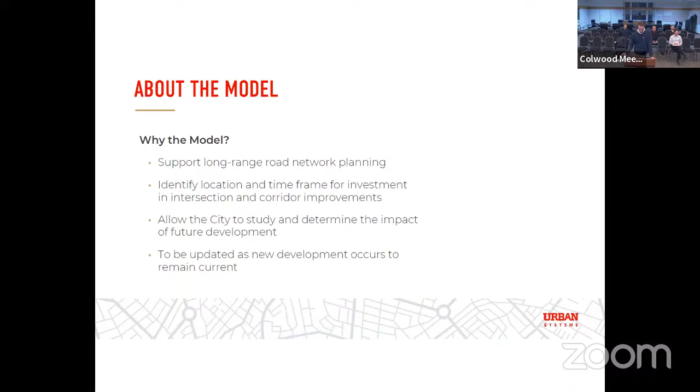So what the model does is based on the city's land use, both existing and future. We'll talk to some of the future scenarios that have been developed, reflecting anticipated land use in future. The existing condition will continually be updated over time, and the goal is that it builds and we watch it progress towards some of these projected future scenarios.

What it does is, rather than calculating traffic, it's actually estimating travel demand. It's really based around total trip making and trip patterns rather than strictly traffic volumes. It assigns future trips between a series of identified zones, projecting out travel demand between those zones.

What it doesn't do is specifically test corridor or intersection performance. Additional study is needed to take the outputs from the macro, citywide model and apply them at a more micro scale at the intersection level to test exact intersection performance. So that's a key distinction here: the demand model really is about movement and patterns.

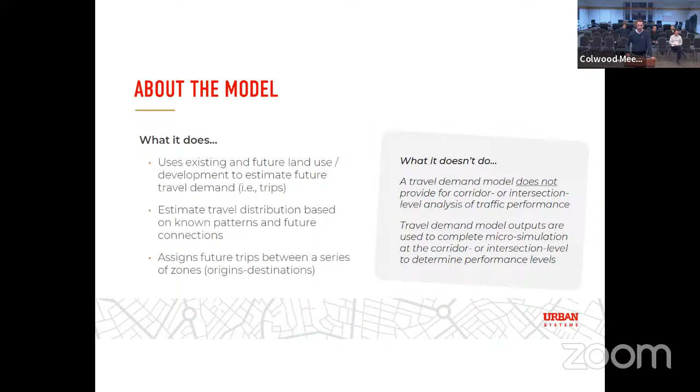We're also able to attribute internal-to-external trip making beyond the city's boundaries into 8 external zones. You work around the city — Metchosin to the south, Langford to the west, and View Royal and beyond to the north and east. Traffic in and out via those gateways has been accounted for as well.

Importantly, a key parameter is that the modeling work represents the AM peak period — the busiest hour of the day, in the morning. That represents, generally speaking, an outward flow of traffic out of the city as people go to school or work for the day. The PM would account for that flow coming back, but this model is based around AM conditions.

Can I just ask you to explain to the committee how you chose 22 zones in Colwood? Because they don't seem especially intuitive to me for a lot of it — they're not neighborhoods we would traditionally recognize.

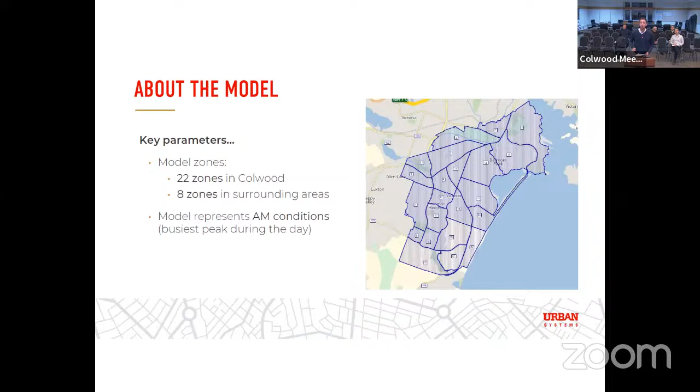Okay, so I think just keep the zones, both internal and external, in mind. A couple other pieces of information the model is founded on: on the left is a map of existing laning. That's pretty straightforward - I mentioned major streets only, so arterials and collectors, this doesn't deal in locals. Inherent in that is a little bit of noise. When we talk about the volumes carried on arterials and collectors, it's 10 or 20 times typically what's on the locals, so a little of that gets absorbed elsewhere, but generally the majors are what we care about. And then I mentioned briefly too that there was a calibration exercise.

So we populate the model with land use - whether it's residential or commercial institutional - there's an anticipated number of trips that comes with every single home, or every 100 square feet of commercial floor area. We let the model do its thing, and it'll tell us where the demand for each of those trips is to and from. But then we calibrate - so we went into the field, did a number of traffic counts, this was going back to 2022, I think, might have been early 2023. We test what the model says volumes will be on the major roads against what the counts actually say they are. We're able to update, massage and calibrate the model to make sure it's reflecting what's happening today, and that's our starting point.

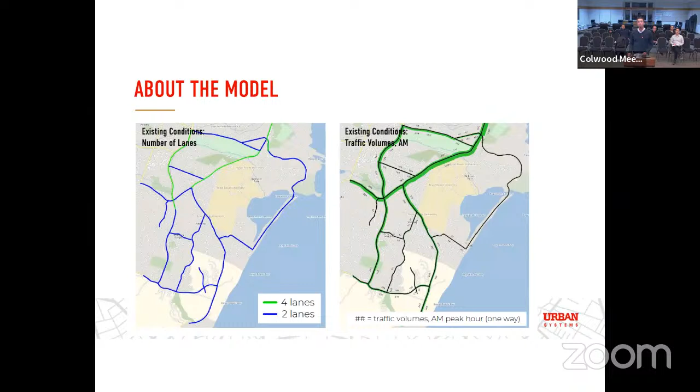So I'll talk through a few of the scenarios that have been tested. There's a fair bit here. So we started this off - this is going back a year plus - we tested three scenarios. One was, I think we called it scenario 0, the existing condition, so that was this initial modeling with the calibration applied.

Scenario 1 was a future growth scenario that represents 2041, which is the scenario included in the 2018 OCP. And then a second scenario, which we called full build out, which accounts for the full build out of the known land use being proposed in South Colwood - the Beachlands, Royal Bay, Olympic View, etc.

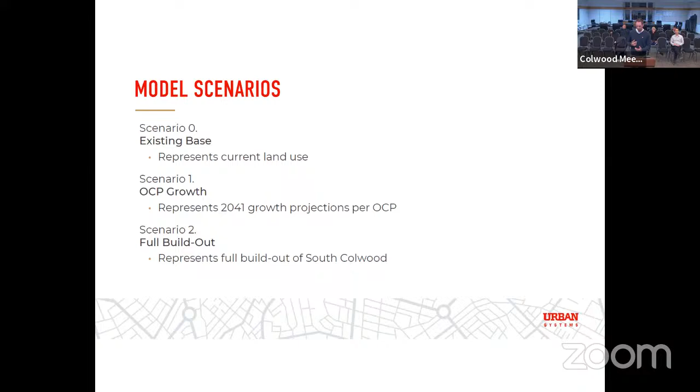Along with the land use scenarios are some assumptions around how the street network is built out over time. We largely followed the pre-existing transportation master plan and OCP road network assumptions or planned connections.

Oh sorry, I got a number of questions, but just a few that I think I want to make sure I'm clearly understanding what you're presenting. Could you back up a few slides to the model?

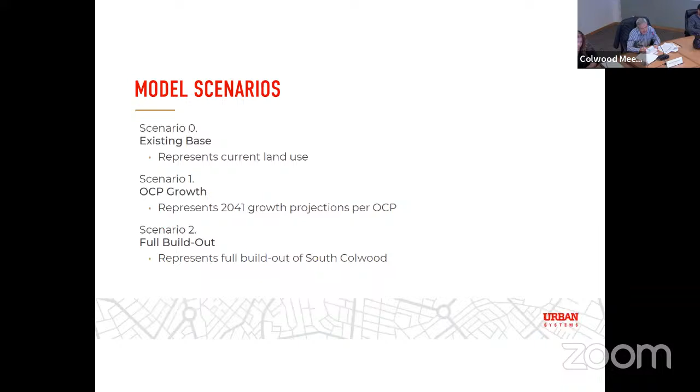There. So if I read that right-hand map correctly, it tells me existing conditions are all flowing at green, which I presume means they're all good? Is that what I should infer from the green lines?

It's a good question, I'm glad you asked. We're basically showing: the thicker the line, the higher the volumes. So we're seeing some of the thickest lines on Sooke Road and Veterans Memorial Parkway. It's not related to percentage of capacity or anything like that. Green does not mean go in this case. Yeah, that's interesting, thank you.

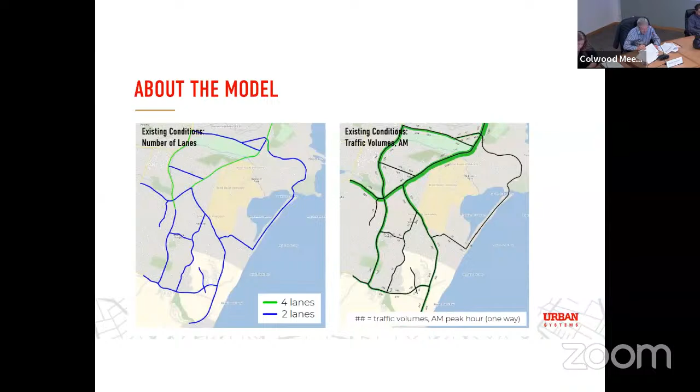And then sliding forward, I see OCP growth, scenario 1, 2041 population, and scenario 2, full build out. Okay, so how long do we think for scenario 2 - is that a timeframe?

That's a really good question that's come up at a few points around the council table and in various discussions. It's based on the land use, not a horizon year. We've been asked, well then how do we know when certain improvements are going to be triggered? So we're guessing we've used sort of a 2060-2070 type timeframe for that full build out. But really that scenario is a land-use-based scenario, not a timeframe-based scenario. So scenario 1, if everything in the current OCP was built, that would be scenario 1. And if some maximum build out, everything that could be developed was developed, that would be scenario 2.

Yeah, okay, not quite, sorry - scenario 1 is the growth that staff expect to achieve by 2041. So my understanding was there was an independent study by Colliers on the development potential and likelihood associated with the land use that's been included in the OCP, the 2018 OCP. Okay, yeah, so that's the Colliers study numbers - scenario 0 is the very first one, scenario 1 is with the Colliers growth included, and scenario 2 is with everything we currently have in the OCP approved.

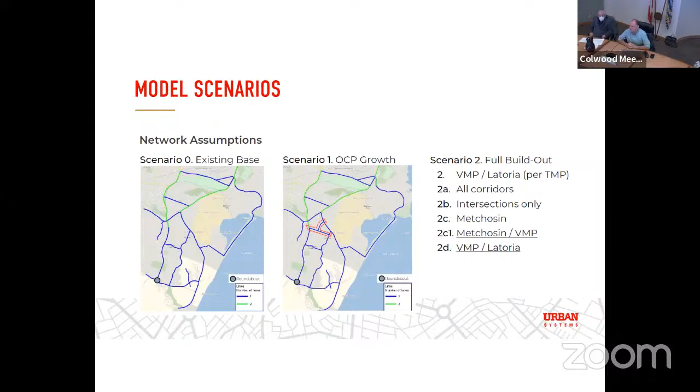And then my last one, of course, is to what I think everybody else has been saying as well: if we free up the traffic on this end, what are the considerations for the rest of the major corridor going out? You've got Veterans Memorial going through Langford, and then you have Sooke Road, which is already constrained during that peak period, way over capacity now. Is there future consideration on that as part of your longer term plan that would be influenced by some of this modeling? Thank you.

So I count 5 questions in there, I think. Happy to work through those.

Your first question was around whether the model accounts for the city's modal shift objectives - more people walking, cycling, on transit. It's a really good point. It does not. In a way, it predicts a static demand pattern. So if anything, the rate at which future land use generates trips could be factored down to reflect that. The results to date should be treated conservatively - they represent patterns of today.

Your second question was around what if Royal Roads University doesn't look in the future like it does today. We did not model a scenario where Royal Roads looks meaningfully different. I think we would need to understand what that redevelopment could look like, but of course that could be modeled to reflect that. We have not done so.

Your third question was around the rate of growth and what if it actually occurs more quickly than we thought it might. That can simply shift the timeframes where network improvements are triggered - the need for a signal, a roundabout, or a widening of the corridor. It's more of a shuffle on the timeframe that's found. All this modeling really deals less with exact years - it tries to predict years because we want to know when to get budget in place to build things, but really it's a reflection of land use. So if that land use is realized more quickly, the timeframe just ends up applying sooner. That can be accounted for.

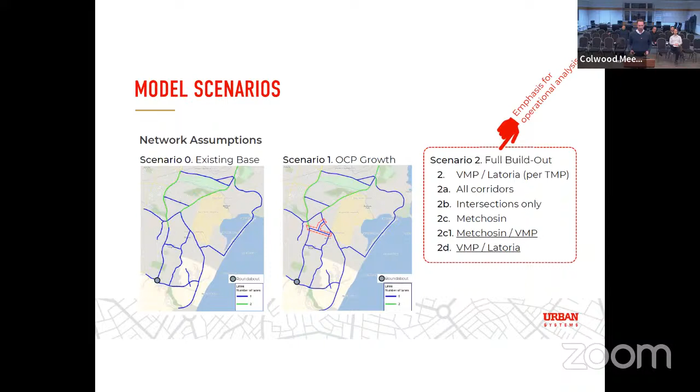So the sub-scenarios under scenario 2 that have been tested, from left to right, there were 2 sub-scenarios focused around widening of VMP to 4 lanes and widening of Latoria to 4 lanes, as well as widening the northern portion of Metchosin Road that approaches Sooke Road - 4-laning of that section as well.

So Dan meant Latoria when he said Wishart. Oh yeah, that would have been a lie - I said we're not widening Wishart. Yeah, I meant Latoria. Great clarification.

2A is a scenario, the second from the left, founded on each of the 3 major corridors being widened - VMP, Latoria, and Metchosin. That's obviously the biggest investment in widening of any of the scenarios.

2C is a widening scenario focused on Metchosin Road only - no expanded widening of VMP and none on Latoria. We realized there's a limitless number of scenarios, but we did end up with a 2C.1, which was 4-laning of Metchosin, 4-laning of VMP, and more or less status quo - some intersection improvements - on Latoria.

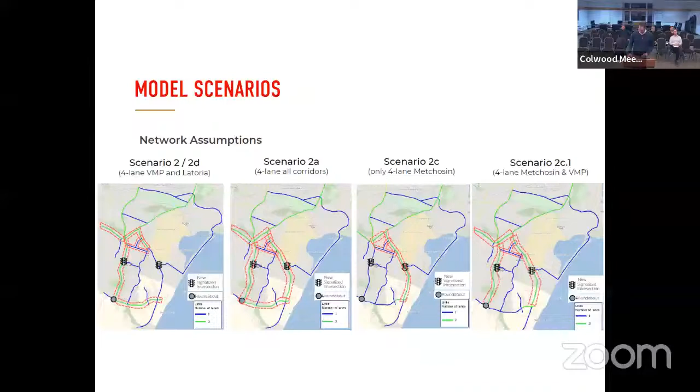So those are the scenarios. I talked about the demand model, which is step 1 in all of this, and then intersection analysis or operational analysis is step 2.

With those scenarios in mind, we're able to output demand patterns, including the number of trips moving between the various zones I spoke about. That assigns it to the major corridors, the major streets only. From that, we're able to understand the anticipated traffic volumes on these streets and run the analysis accordingly.

Maybe I won't go through all of these, but it's the bulk of either arterial or arterial-collector intersections along Sooke, Metchosin, VMP, and Latoria.

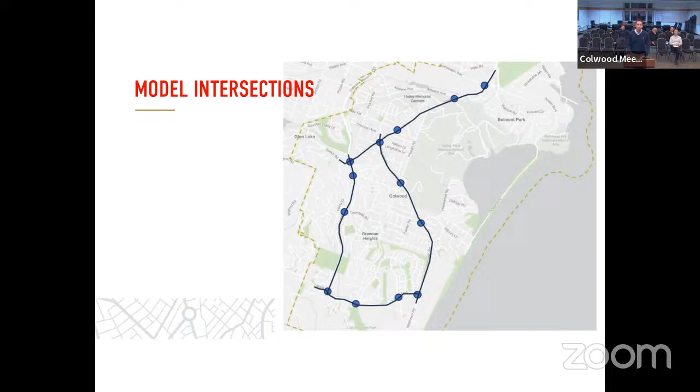The work is done to assess level of performance, or level of service, LOS. It's kind of a letter grade system—A is great, F is failing, with a degrading scale between A and F. It deals in delay, seconds of delay—that's what it's measuring.

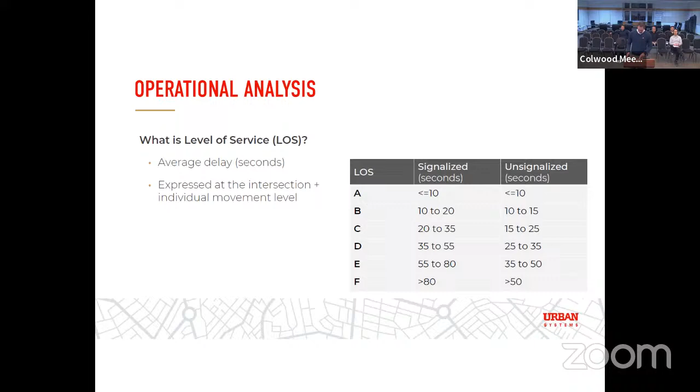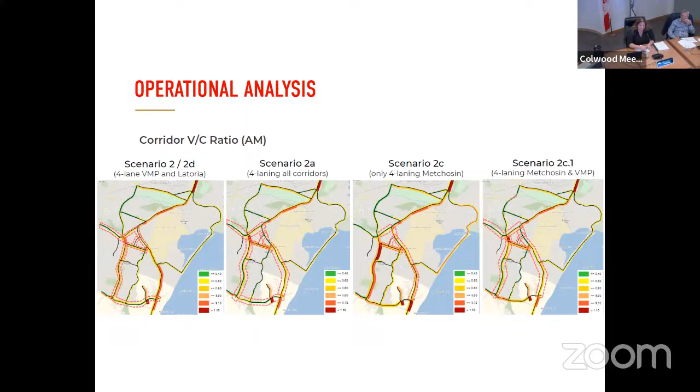I think it's great that we're thinking about specific locations and what the issues are there. But we also need to remember that when we're looking at our full build-out, long-time-from-now scenario, the configuration of these properties may not be the same. That's just a reality of densification along roadways and redevelopment in some of these areas. I'm not suggesting anybody's forced to redevelop, but it may not look like what we think it would look like. We're trying to do our best guess, big picture thinking with little picture details.

But if there's a particular modeling that we could envision being very informative, that's something council might need to hear from this committee, so that we could recommend to council: hey, the infrastructure committee thinks you should look at this area.

With the modeling, I'd suggest one of the times worth looking at - I know we're looking at the busiest time frame in the morning - but the other time frame I see happening on all the roads in every municipality is the school pickup time. All the roads everywhere, cashiers get busier at Thrifty's, people are clearing out of the Costco parking lot because they've got to go pick up kids from school. They're driving all over, people aren't in their catchment areas, and it's impacting our roads. So my question is: is that busy AM model able to be used for an afternoon school pickup time, or do we need more information? Would it be vastly different in some way?

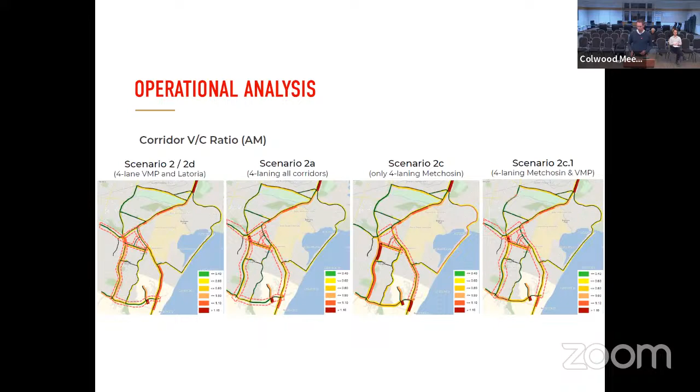Okay, so with the various scenarios and sub-scenarios in mind, we went through this exercise of assessing level of service and then volume-to-capacity ratio, and that led us to zero in on two sub-scenarios.

These have been the topic of some conversation as well. The one scenario shown on the map on the left is the Latoria and VMP widened scenario. The one on the right is the VMP and Metchosin widened scenario. I think what we wanted to demonstrate is that from a performance perspective, neither is perfect - delay will be incurred over on one corridor or the other, depending on where the capacity adds go and the timing of how quickly they come online.

I think it's important to note - I'm not sure if I'm touching on this later, but I think I will - these diagrams, we all sort of gravitate toward diagrams, but this is oversimplifying what the full package of improvements would be. If it were a Latoria and VMP focused widening, there would still need to be intersection upgrades, turn lanes, potential for a third center turn lane on Metchosin over time. Vice versa, if the widening efforts happened over on Metchosin, there would still be a need for more modest upgrades on Latoria as well. So it's not just widen this or widen that - it's a suite of improvements necessary to keep things moving over time.

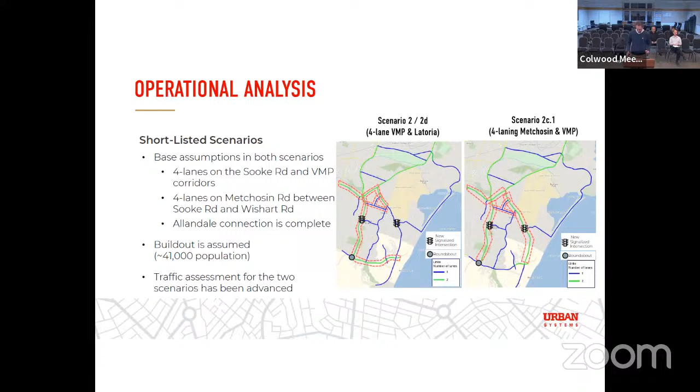Yeah, I think we touched on this.

Okay, and then one of the choke points that becomes apparent in all of this - and I understand you're experiencing it to an extent today - is in the vicinity of VMP Sooke and VMP Allandale. Under either scenario, there's a focus on essentially building out VMP over time. Our expectation is we'll still need added capacity under either scenario along VMP, specifically at VMP and Sooke and VMP Allandale as well. John mentioned the pushing forward on signalization at Cairndale, which is more of an immediate thing.

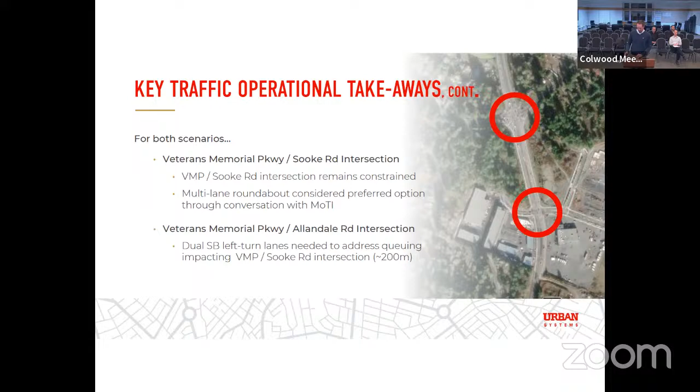This captures what I mentioned a second ago, where the exercise has been focused on widening this one or widening that one, but really is a suite of improvements. Whether one is addressed full scale, Latoria or Metchosin, the expectation is the other will still require improvements over time as well.

So some of those under a Metchosin Road corridor widening scenario: we anticipate that the volume of driveways along that corridor will present a real challenge. As you add traffic to a corridor with a number of driveways, that's really opposed to the typical objectives around arterials or major streets. Typically we want to limit the number of access points so high volumes of traffic can continue to flow, like VMP is a great example.

So a key takeaway on a scenario involving widening Metchosin Road: we expect dual northbound left turn lanes will be required at Wishart-Metchosin or Sooke-Metchosin, since there's going to be an on and off point at the ends as well, so added capacity is needed to address that. And then there's a need for signalization or capacity adds at some of the more secondary intersections along the corridor, Lagoon, Painter, Hatley as examples.

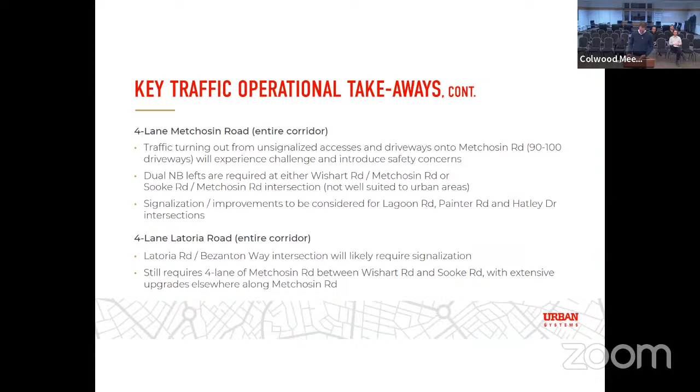Stepping outside like this, we structured this conversation to go from a modeling exercise, understanding what the major street network might look like over time, and then funnel that into directions that can be woven into the TMP update. I know we're not having the TMP conversation tonight, but we wanted to introduce and get on everyone's mind this idea that there's a package of improvements under either scenario that can result in adequate traffic performance over time.

Traffic performance, we need to be looking out beyond simply just traffic. There's a way we can make that work, it's just lots and lots of money. We need to think beyond simply the traffic component of the street network into some of the other factors that might go into determining which is the right scenario to pursue.

So, could you just back up for a minute to your options analysis slide before that? I'm having a hard time understanding what the little graphic is trying to tell us.

It's just a summarization of which corridors are widened under which scenario, so the check mark means yes, widened. Oh okay, I see, don't worry about that too much, we've covered the scenarios well.

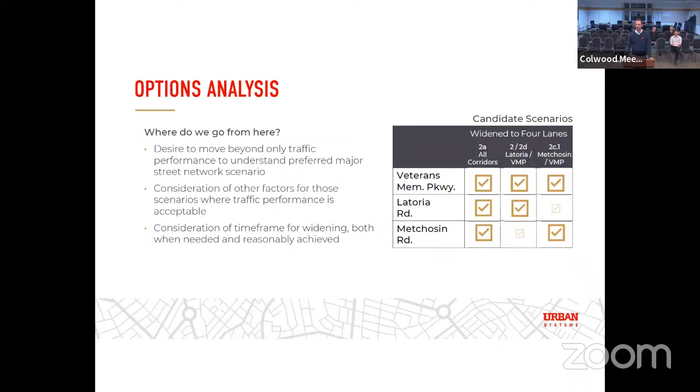Okay, I'll let you carry on.

On Latoria, there's still added width that would be necessary, but we're dealing with a more limited number of private landowners. As those properties, including Latoria North which is being contemplated right now, come up for redevelopment, I think we're talking about 8 or 10 parcels that need a certain sliver of land along their frontage acquired, rather than the 80 plus along Metchosin. So that's a benefit in terms of acquiring that right-of-way for Latoria, making it conceivably more achievable in a shorter time frame.

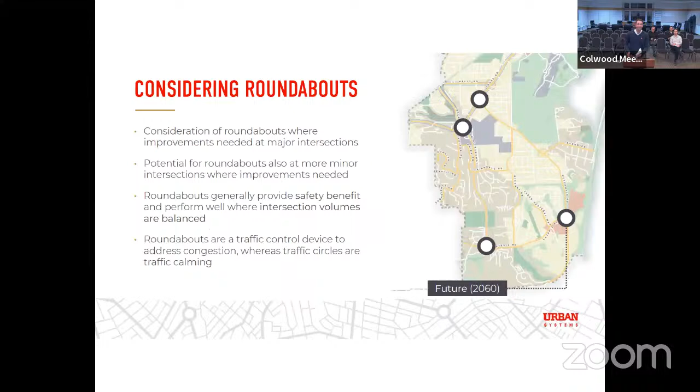Okay, carry on. Well, actually, that's all I had. I had a concluding slide - I believe we've kind of worked through this already, but none of the scenarios is perfect from a traffic perspective. They are based on a full build out, so we aren't going to be realizing this for the conditions we talk about for quite some time. But it is important we are as proactive as we can be in terms of assembling the right of way that we need to achieve what we will need one day. Also I wanted to reiterate that this reflects the busiest time of day, not all times, but the busiest times.

Great. Thank you very much. Anything else from the committee?

Not seeing any, then we will move back to... oh, sorry, Stuart. My apologies. Well, that's okay. Just a couple of thoughts, I guess.

I guess I'm not overly fussed about trying to project out to 2060. We could make some great roads in Colwood and they could feed into Sooke Road that's got so many lanes and it's not going to get bigger, and everybody else is going to grow. There's got to be answers besides just more roads and more cars going in the same way, whether that's better transit or congestion charges or whatever. There's going to be changes, but I think we are at the point where we should define what we are going to do. How fast it comes, I think, is really dependent more on the pace of development than necessarily the years, because the development may in fact happen a little quicker for a few years, maybe some slowdowns, who knows. But I think it is important that we define kind of broadly what we think council should, or Colwood as a whole should do with their traffic, and I think now is a chance to do that.